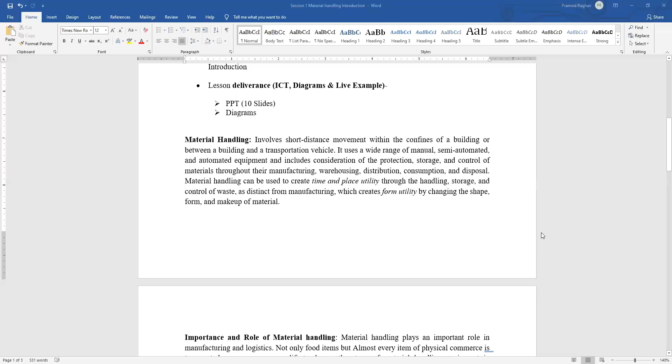Material handling has a very important role in all sectors, as I told you. It involves various material handling equipment, and as I mentioned, it saves a lot of time and energy. That is the basic of material handling.

What is more important is that material handling must be very well designed. If it is not properly designed, it may lead to loss in production, loss of quality, and more expenses. So we have to be very careful when designing the material handling system.

Where we are getting the product, and where the next operation takes place—for example, receiving fruits and vegetables, and where I'm putting my first operation like washing, cleaning, grading, and peeling and so forth—these things must be arranged in a very accurate manner to make material handling more efficient.

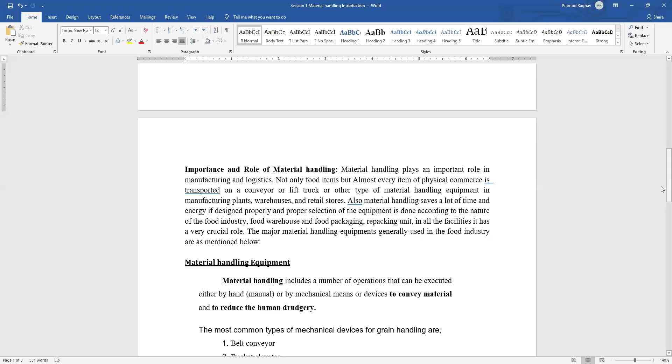Material handling is not only done by hand. It involves various material handling equipment, and those equipment are frequently used in the food industry.

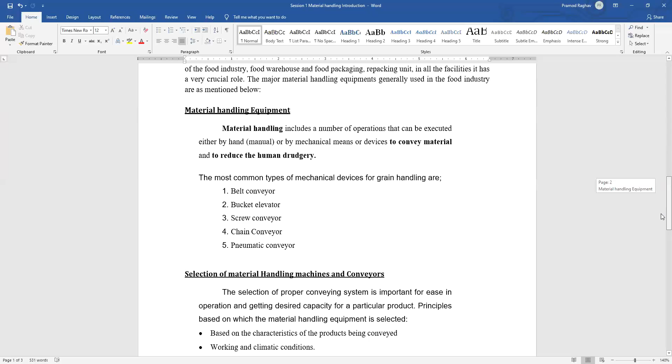They start from conveyors, elevators, lifts, and industrial trucks, which we use inside the food processing plant or inside a warehouse to lift the material and move it from one place to another—along with various types of conveyors and elevators. So these are all material handling equipment.

Why is selection important? Let me come to the selection of material handling equipment. Selection is extremely important, as I told you. Now, when I have to select, on what factors does this selection depend?

It depends on the type of product I am dealing with—whether it is fully packed or unpacked, liquid material or solid material. And then the capacity of that equipment—what is the capacity of that equipment? I have to consider that.

The capacity of the equipment I am selecting must match with the processing unit, or if it's a warehouse, with the size of the warehouse and the amount of product coming in and going out. These points are to be considered while selecting the material handling equipment.

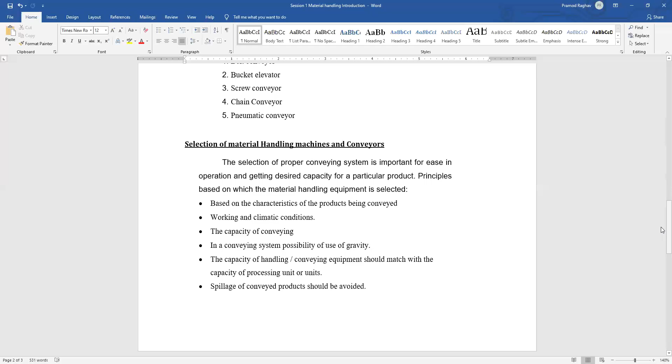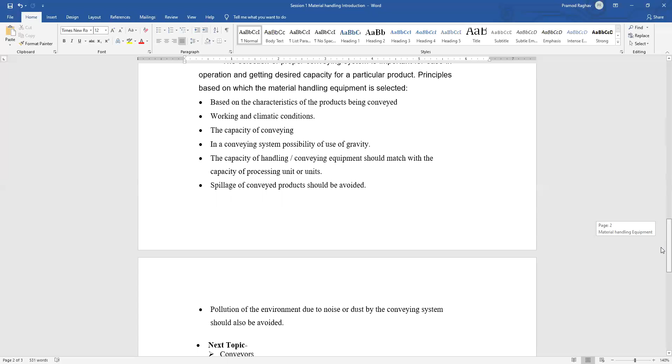Spillage of conveyed products is also to be considered—if my product is getting spilled out, there is a loss again. So while selecting equipment, I have to keep in mind that the product safety and loss should be controlled, and pollution is also to be controlled. These are various points to keep in mind while selecting material handling equipment.

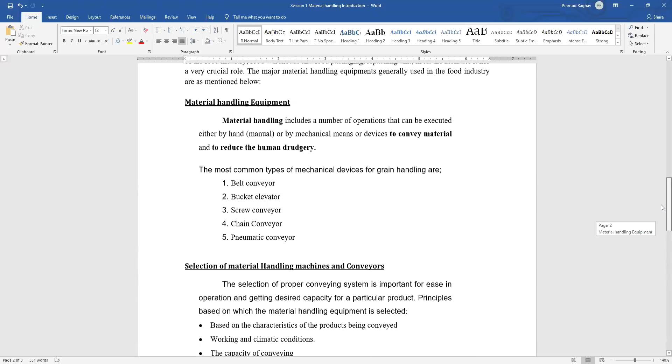So this was the basic introduction about material handling and material handling equipment. You can go through these handouts, plus the recommended material, and take a look at the recommended video also, which I have included.